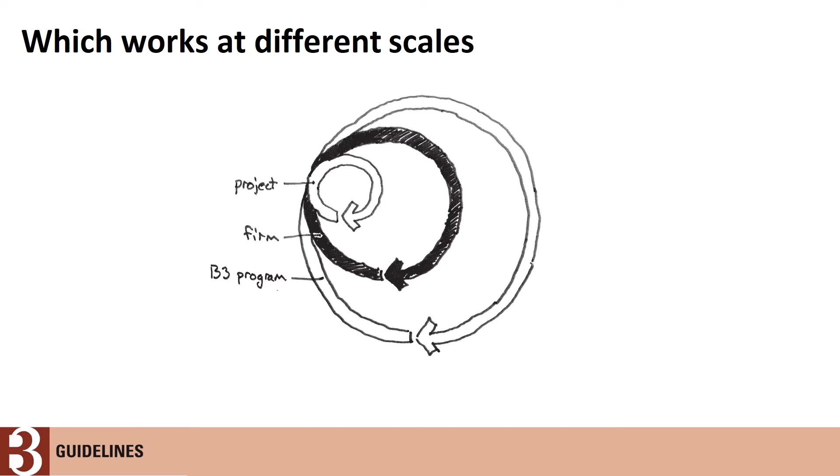Also, I think as we looked at this and after we did SB 2030, which is the energy program that sets definite kind of metrics, we thought we should create and evolve all the guidelines to more sustainable metrics.

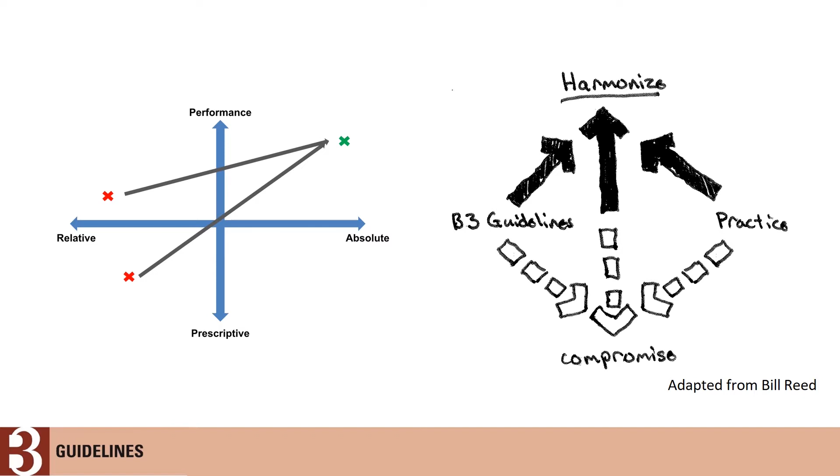And we've been offering educational courses. When we started SB 2030, we did a survey about how architectural firms would hit SB 2030. And we realized that really education is an important part of practice in order to build capacity to get there. And certainly this is one of the things.

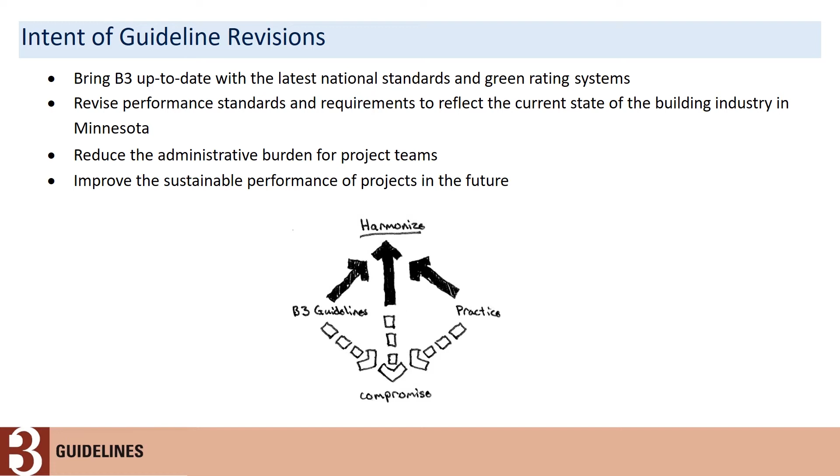We don't want to be on the bleeding edge, but these guidelines probably won't be revised in 10 years. So if we take a middle point or low point, in 10 years we'll be way behind. So I think we're above average on this. If we're good looking above average kind of people. And so we want to make sure we're pushing the envelope, but not on the bleeding edge.

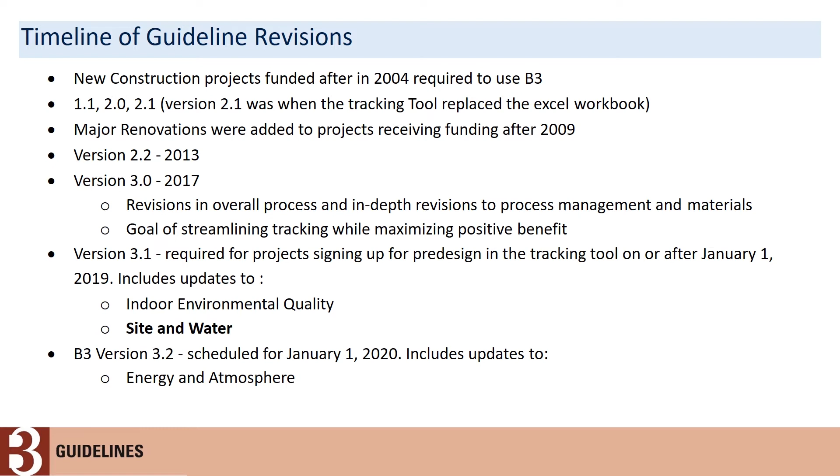So we will do energy and atmosphere next year, and have you got any feeling what kind of changes are going to happen on that? A lot of that is determining what renewables look like, similar to what we did here, if you can't do it on your building site, but you may have a campus opportunity to do that, and what all of the process is around that. Okay. So that will be coming out next year. Okay.

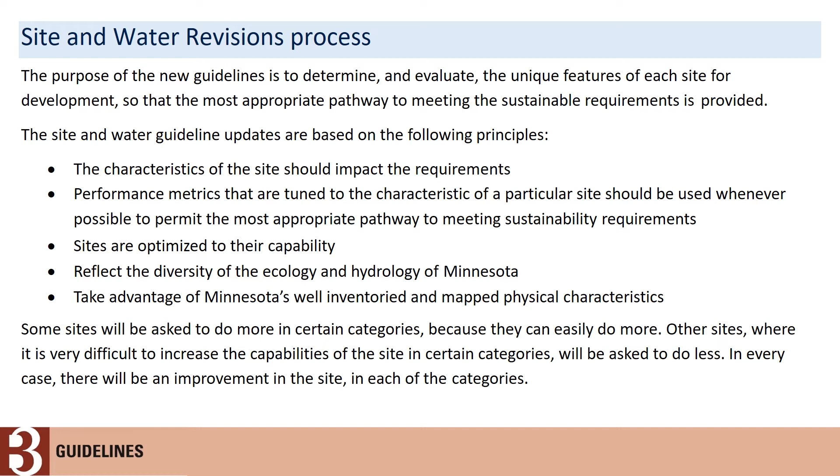And it reflects the diversity of the ecology and the hydrology of Minnesota. And it takes advantage of Minnesota's inventoried site conditions. It's surprising, we're one of the few states in the union that have very, very good site characteristics across the whole state. They've been inventoried, and we'll look at some of those. Some will be asked to do more in certain categories, some will be asked to do less. But in every case, there will be an ecological improvement in the site. That is the determining factor.

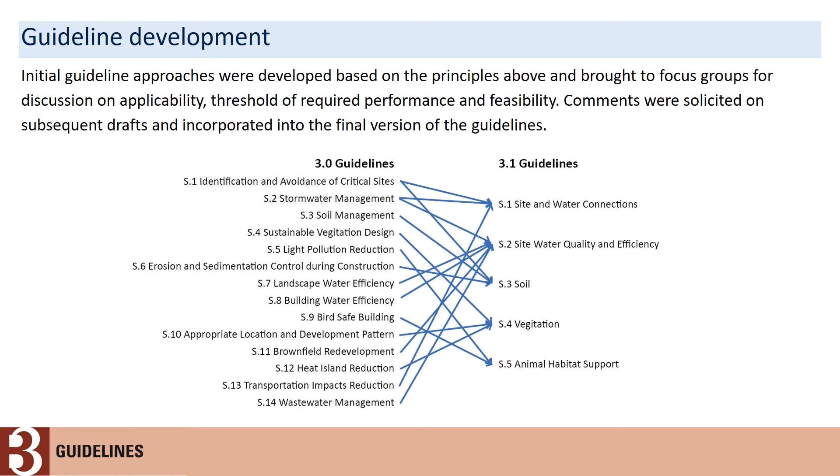So here's what I mentioned before. The bad news is there were 14 before. The good news is there's only 5 now. But we're not asking you to do more. We're just asking you to do it differently this time. I think the old guidelines were just old thinking, saying that every site should have so many trees, every site should have this much water capacity, and so forth. They were too binding for the sites, but we know about sites.

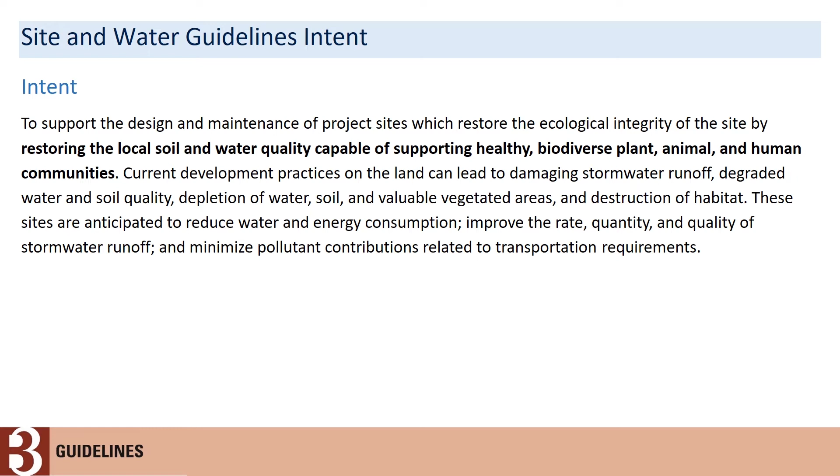The Millennium Assessment in 2000 put a stick in the sand, and now we look 15 years later, almost every ecological system on Earth is degraded, except one. Can anybody mention the one that isn't? They're sitting in this room. Humans haven't degraded, but almost every other ecological system has degraded. So we've got to change, right?

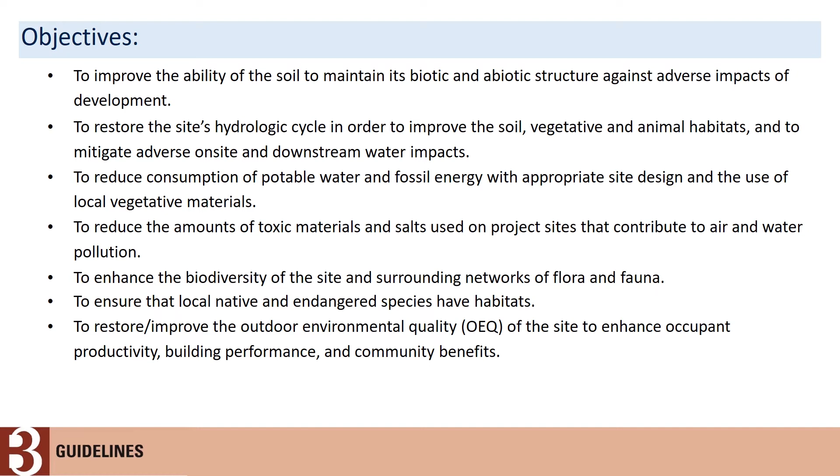I'll let you read these. These are the objectives that we are looking at. Looking at soils, both biotic and abiotic. Restoring the site's hydrological cycle. Reducing potable water and fossil fuel consumption. Reducing the amount of toxic materials. Enhancing biodiversity. And improving outdoor air quality, environmental quality.

So one thing that came up is site. Usually site will be defined by the property lines in most cases, if you have property lines, or it can be defined by how much you're disturbing. So if you're on a large property, a campus or a corporate campus or a park, you can define your own site area by how much you're disturbing, and you can use that. You can stretch it out how you want in order to meet the guidelines. So under site, I think it's pretty flexible.

And let's say you're on a pretty concentrated campus and you need to have some habitat. You don't want to put this bee habitat right next to the entrance of the building. You would like to move it over to a place where it might be more hospitable. And maybe you've done projects before, so if you're building a bee habitat, you might want to put all your bee habitats together. Because the larger the ecological footprint, the better. A lot of small ones aren't as good as one big one.

So we would actually encourage people to put their animal habitat and things like that together on campuses, rather than every project having these small habitats around them. Is that understandable? So there's some flexibility in site, and certainly if you have questions, Pat and Peter and I can talk about that to get the best ecological performance we can out of the site.

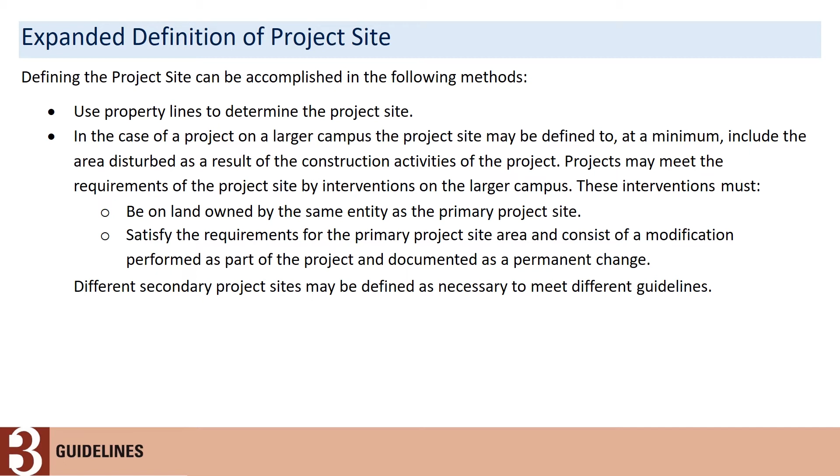Now, when you're dealing with an urban site, it's going to be difficult, and we'll talk about that a little bit. So as long as the land's owned by the same entity, we can do that. And even if the land's owned on either side of a right-of-way, we'll consider that the same entity. So even though a right-of-way might come through there, we'll work with that. And then satisfy the different secondary project sites defined as necessary to meet the different guidelines.

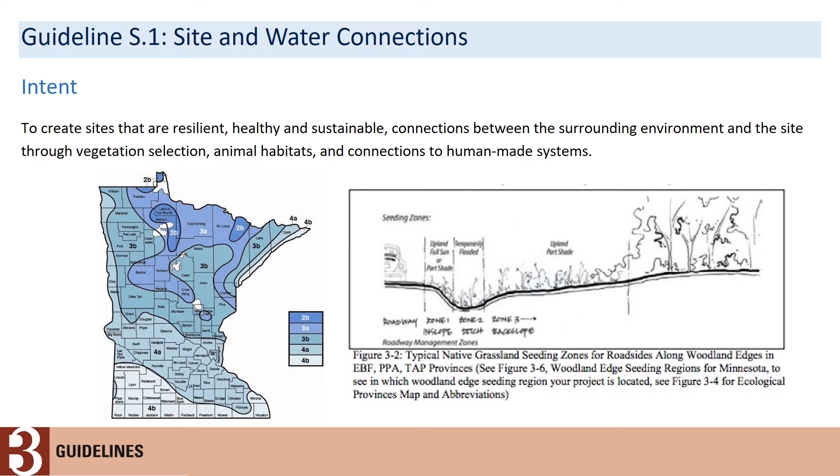So here are site and water guidelines. The first one, we show the hardiness zones. Not every zone in Minnesota has the same ability to have certain plant materials. Peter and I teach a site and water course, in which we talk about rainfall and stuff like that. And it's surprising that students don't know it doesn't rain the same amount across Minnesota, much less the United States. They think every place has the same amount of rain. So until you come about thinking about that, then it really makes a difference. And of course, you know about it.

What's really neat about Minnesota was this Marschner map. And the land survey from 1847 to 1907, essentially people walked Minnesota, I believe by square mile, and they not only drew maps of the area, but they also made observations about water, ponds, rivers, trees. Basically they were looking for resources, but what this gives us is a really good map of exactly what was here, the natural vegetation before we decided to farm practically the entire state. And you can get it almost down to a site level.

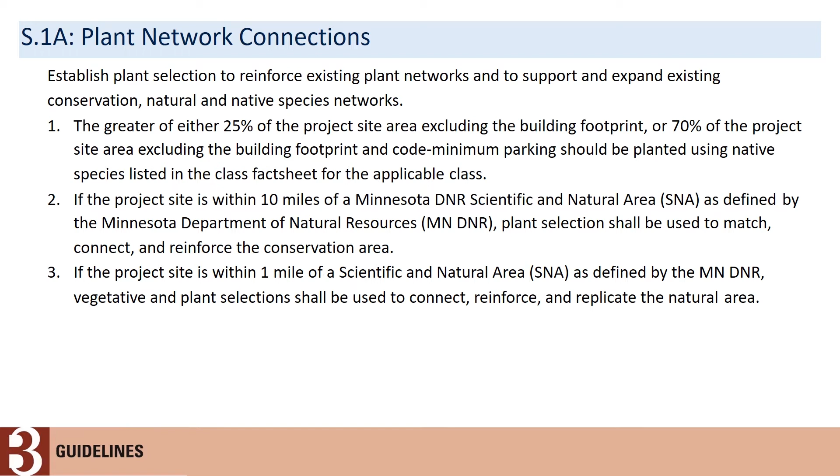Then animal connections. So if you're within 10 miles of a flyway, you're going to have to create nesting habitats and feeding stopovers, some kind of feeding, water, and habitat on your site. There's not too many major flyways here: Mississippi, Red River, and maybe some other ones, but they're pretty well defined. So if you're within 10 miles on either side of those flyways, you're going to have to start creating some habitat. If you're within 1 mile of an existing or planned animal movement corridor, then you're going to have to talk about how you are going to support that, and we'll talk about that a little bit. If you're within 10 miles of a wildlife management area, we expect some kind of connection there.

If the site is within 1 mile of terrestrial habitat of rare, threatened, or endangered species, if the project's within 1 mile of a habitat of a rare endangered insect or arthropod, and then if it's adjacent to aquatic habitat of rare threatened fish, if the project's within 1 mile of a known bird habitat or nesting of rare, threatened, endangered species, and then if the project's within 10 miles of a national refuge.

All those things will require you to make some kind of connection in some way, whether it's through the plant connections, a habitat connection, or a food connection that habitat would be compatible with. So each one of these will be specific, and I'll get to that. Then there's human connections.

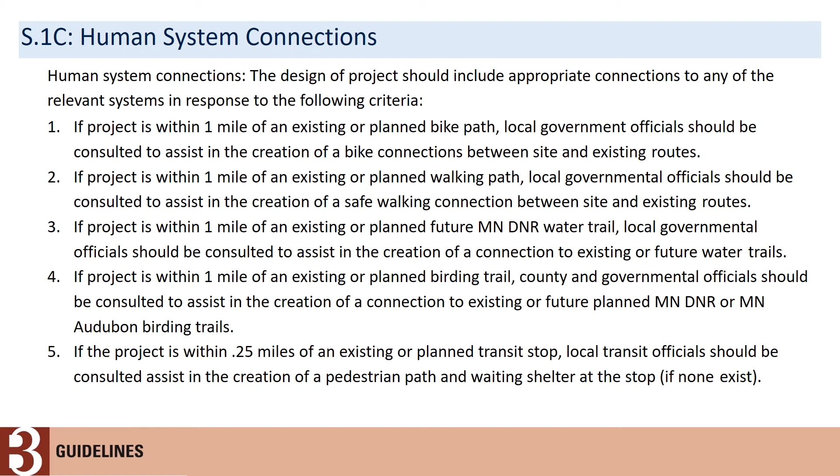It's a little nebulous, but at least your project should not be an impediment to any one of these expansions into these trails. So if they're close to you, you should be aware of it. It might even come close to your site or right through your site. Okay, and then a quarter mile for existing transit stop. That was in the last one, but essentially all these other ones are not. So again, it requires some circumspection of the site.

And here's the requirements. So how we determine is listing vegetation selected, demonstrating compliance, including a class fact sheet, narrative on the project's connection to native and conservation areas, and list of species selected from the class fact sheet. So each one of these SNAs has a list of plant species that are in that SNA, and we would expect you to show that and also your plant selection.

And then a lot of it is just documenting on the site plan, animal habitat is required, and also human networks, where they are. You might have to show a little regional map. If there's none in the area, then you're scot-free, aren't you? But if there is, then you're going to have to start making those connections. So it's a lot of requirements, but if you aren't within 10 miles of an SNA, you're done.

And how many SNAs? Do you know how many SNAs there are? Scientific and natural areas. There's about 400 of them in the state of Minnesota. Yeah, there isn't too many in the urban areas, although.

Okay, so I want to talk about water quality and efficiency. Site water and then building water. So again, to restore the natural water cycle. The theme of Peter's and my class that we've been teaching almost 16, 17 years now is restoring the natural water cycle. First you have to know what the water cycle is, and then you've got to work on restoring it. And it's kind of interesting how much we've degraded it throughout the whole of Minnesota.

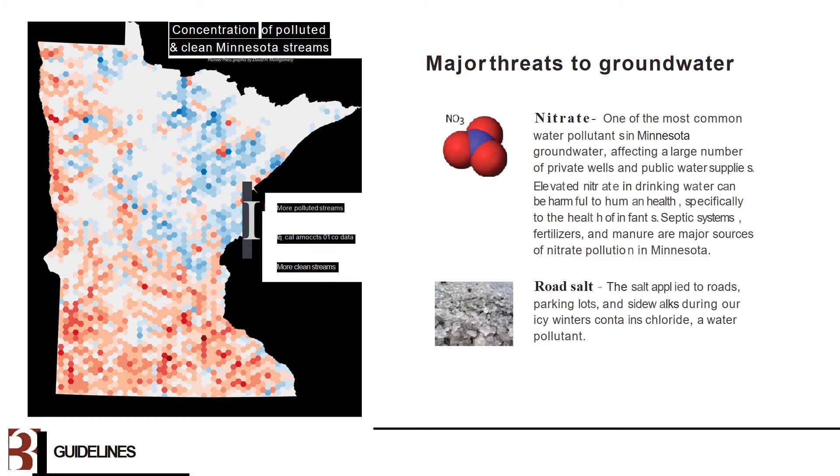So some of the major threats to water quality are nitrates, nitrogen in the runoff, and also road salt. And we'll talk about road salt. Road salt is a new thing coming into this, and we need to address it. But if you're on the top of the watershed, for projects located in uplands, Group A and Group B soils have to infiltrate almost all their water. So why do we want the uplands wet?

Because essentially that's where the groundwater comes in, is the uplands, and it will go down. We don't want to wet the lowlands, right? That's called flooding. So we don't allow a lot of the water to come off the uplands. So if in fact you are in the Midlands or lowlands, you're type A or type B, you follow the other ones. But if you just happen to be located on the top of the watershed, we want to make sure you infiltrate. And then for projects in the lowlands, A and B soils, we want you to infiltrate a little bit less. But again, infiltration. And then if you're located in between, then you follow the other one.

And then features and site locations: watersheds or lake sheds, or any site watershed features should be shown to inform the design of the site. So we have watersheds as well as lake sheds here, right? And if those lake sheds are impacting your site, we want to know whether they're impacting your site. You should know what watershed you're in and where the water is going. And that is broken down pretty precisely on maps the DNR has.

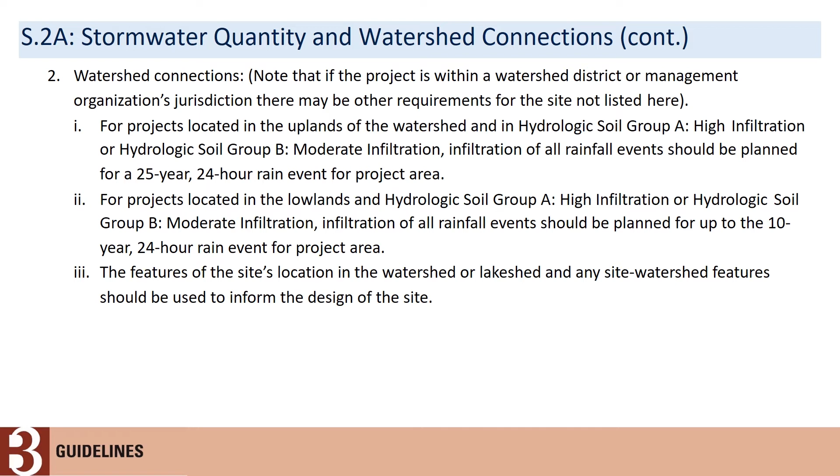Okay. And then the flood prevention, it's essentially you can't build in the floodplain unless it's essential to the program of projects, and then you have to build, I believe it's 2 feet over the 100-year flood. Usually we wouldn't allow you to do it, but sometimes you have to build in a floodplain.

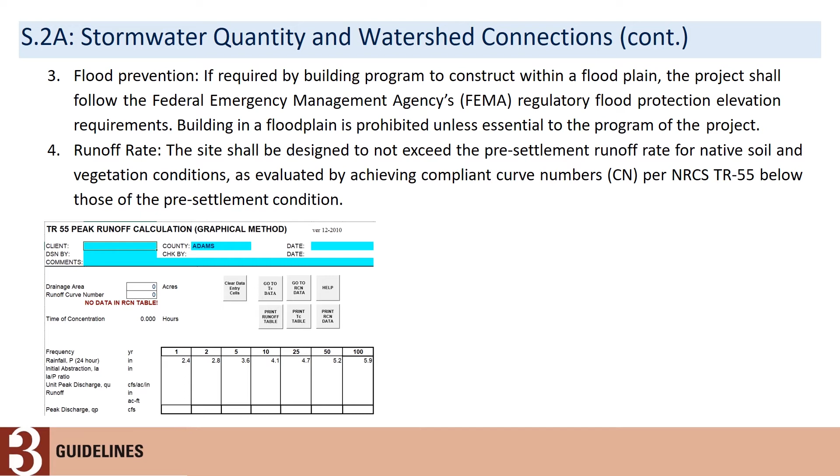And then the runoff rate. Sites should be designed not to exceed the pre-settlement runoff rate for native soils and vegetation. And you can comply with that using TR55. People aware of TR55? It's a pretty simple calculation. There's a map of it. So essentially, when you have runoff, and you can have runoff in B, C, and D soils, it should run off at the same rate as pre-settlement. So there's going to be some holding on some D soils, right? You're going to have to hold it somehow.

Okay. Outdoor water efficiency. Again, this is a change. No potable water should be used for irrigation after 5 years of plant establishment. So after 5 years, no more irrigation from potable water. You can certainly use roof water. We would expect that a lot of the plant species you plant are pretty drought tolerant. But if you want to have areas that you need to water all the time, some special planting areas, you can use roof water to do that. There's an exception: if actual rainfall per month is less than 30% of the average, then potable water can be used again in order to sustain the plants.

And then areas such as athletic fields are exempt. Anything that has a program on it, and it has to be a program that's pretty viable. You can't say, well, we like to walk on this area and look at birds. No, it has to be an athletic one. Then that can use irrigation all the time. Okay, how's everyone feeling about this? The first time we got a lot of pushback on this one. But I think it's doable. I just really think it's doable. And there's no sense in keeping on watering plants when you can use either roof collected rainwater or gray water.

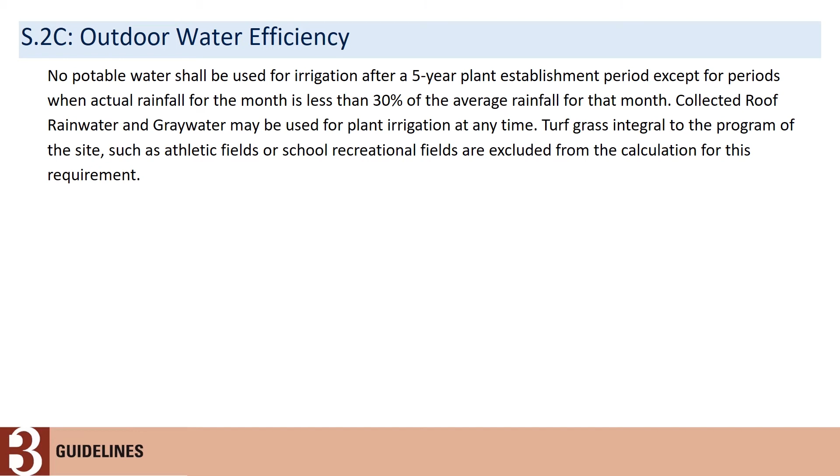Yeah. With some treatment. Okay. Indoor water efficiency, it used to be 30%, it's going up to 50% less than a baseline established on the 1992 Energy Policy Act. So we put that up there. And the criteria can be met using low-flow fixtures, recycled rainwater, and other strategies. So it's just potable water, 50% reduction in potable water.

Renovation portions may be limited to criteria, and it will be based on the number of fixtures, and there we'll ask for certain things. Recycled rainwater can be used to offset the percentage of potable water if it's allowed in the jurisdiction. And to verify compliance, it will be the same operation of the building, the sub-metering. So we have that kind of B3 water guide right now, so we're just going to 50%. So a little bit more ratcheting that down. Any questions on that mechanical?

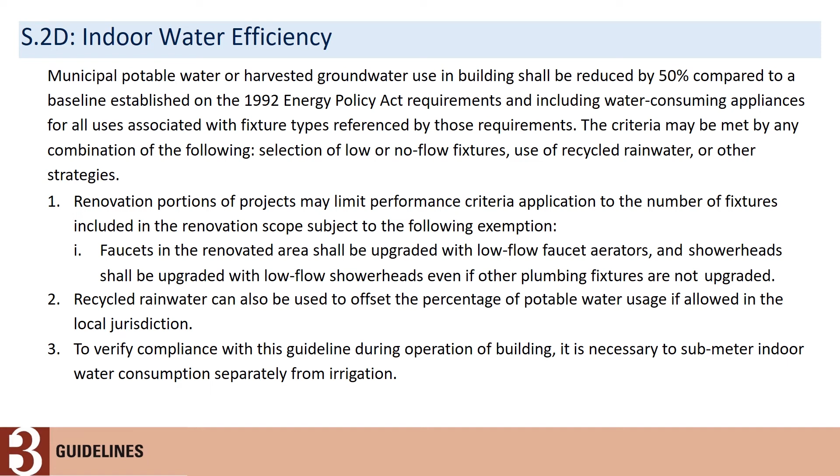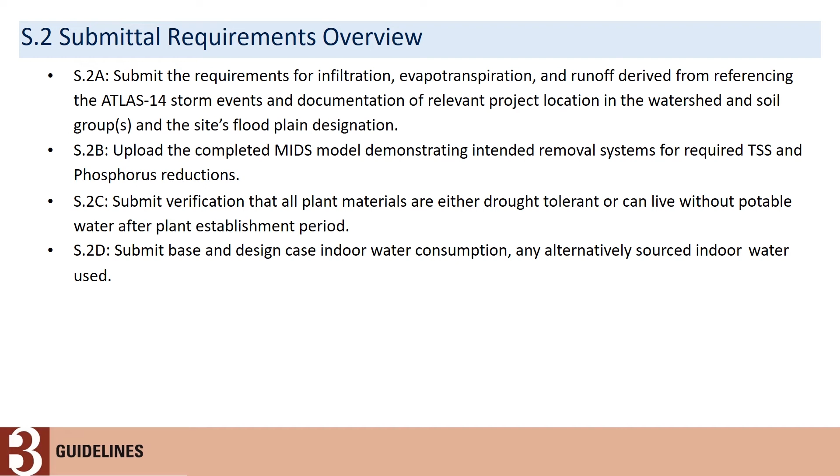And then submittals. Submittal requirements for infiltration, evapotranspiration, etc. Upload the complete MIDS model, demonstrating intent to meet removal systems required for TSS and phosphorus reductions. You could almost use that for 2A too. I think MIDS looks at runoff and all these various things. You can design it within MIDS to look at what best management practice you can use. And then submit all plant materials that are either drought tolerant or can live without potable water. And then submit a base case indoor water consumption. All right? I think that's it. Any more questions on that?

So you can see how we're looking at more network-wide kind of issues than we have before, and looking at information on the site and in the area to support the requirements. So Peter will go on and we'll go even further into this. I'm Peter MacDonagh with Kestrel Design Group. So I'm going to take you through three others, which are soils, vegetation, and habitat fauna.

And we expect that there's the soil triangle. There's 12 types of textures on there. If you go to the Web Soil Survey, WSS, you can excerpt any site in Minnesota, and you put an area of interest around it, and then it comes up on the left side. You'll hit the soil series. It'll tell you the soil series. So the soil series are basically like species of soils, and it'll tell you what textures your soils are.

It'll give you all of this detail, except if it's in a very urban area and it's a Udorthents or it's Udipsamments. So it's a sandy kind of urban soil, or it's an all mixed in kind of an urban soil. In which case, there's other things that you get directed somewhere else. We're looking for you to then amend those soils if you're planting stuff into it. But if you've got this kind of a system that you fall into, then we want you to work with the WSS, the Web Soil Survey.

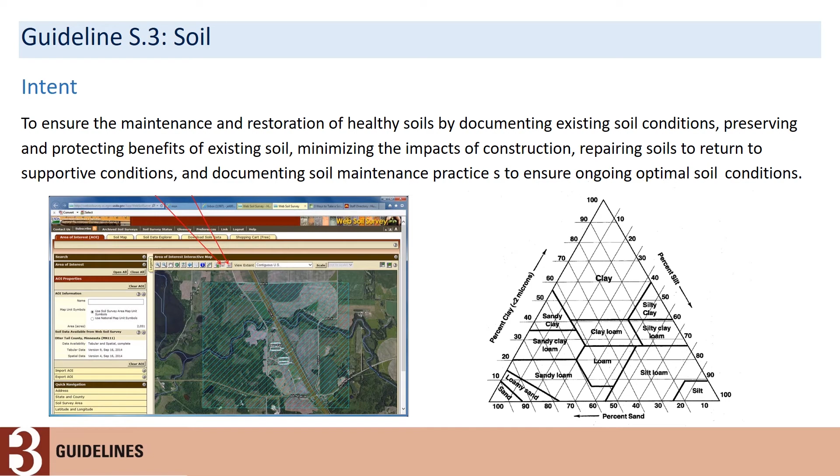So a site soil inventory map, and this is for the areas that you're not putting buildings on or you're not putting parking lots on. It's for that area. 8 soil orders. So Minnesota has 8 soil orders, 1,000 soil series. But like I said, if you go to that site, you will get all of that information. So you don't have to send a soil scientist out on site to get it for you.

Listing of soil limiting constraints for organic or wetland or expansive soils. So if you're up in the Red River Valley, vertisols, shrink swell. That'll take you into a different category. Obviously, wetland soils, we want to know what's going on there in terms of, is that a jurisdictional wetland or not? And organic soils, if there's a very, very high organic matter in there, as an example, 10%. Or histosols have 30%, so they're really gooey. That puts you into another category.

3 stages. So we've come up with these 3 categories of soil, whether it's a natural soil, an agricultural soil, or an urban soil. So if you see that Udorthents or Udipsamments come up, that's an urban soil. If it's agricultural, it means that if you dug a trench, you'd see an A horizon and a B horizon and a C horizon, but you'd see compaction and other kinds of things in there. And if it's a natural soil, so it was woodland and then it was cleared off and it was grazed, but it was never plowed, then that will have an O horizon as well and maybe an E horizon too. So that's defined in there.

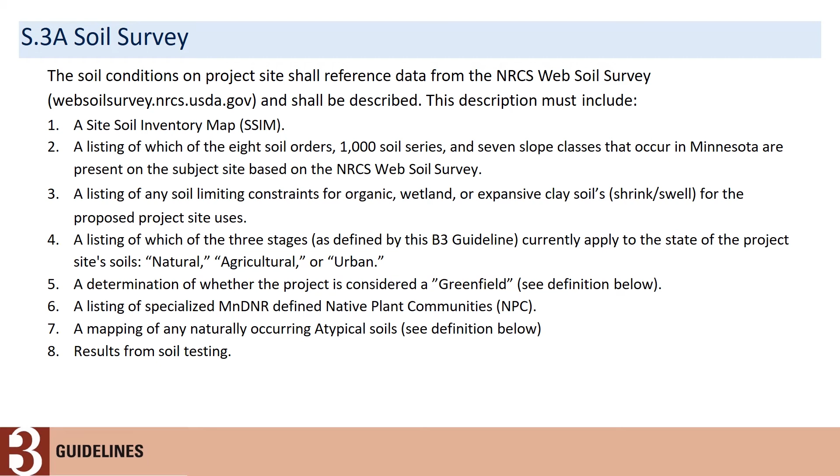And atypical soils. So that's an unusual situation. So I said a histosol as an example, or a vertisol, then we want you to treat those differently, but you're rarely going to encounter that. So that's just kind of almost an outlier. And then we want you to do some soil testing, but it's the soil testing you get at the University of Minnesota Soil Lab. $17 a test, that kind of thing. So we're not asking for something really extensive, but we want you to know what it is you're dealing with. And I said about the greenfield site rationale, if you have to be on a greenfield, these are the things that we are requiring for you to do.

Limit soil disturbance. So these are from landscape architecture practices. So these are not new, but we want to put it in this so that it becomes part of this guideline. So 40 feet beyond the building perimeter. So again, all of you have seen some of these trucks have some kind of magnetic attraction to green fields, so they just keep driving out onto green areas. We want to eliminate that. So we want to put the boundaries on that and enforce it. So we've got distance from buildings, from roads, from walkways, and from trees. Stormwater management areas, obviously an infiltration area.

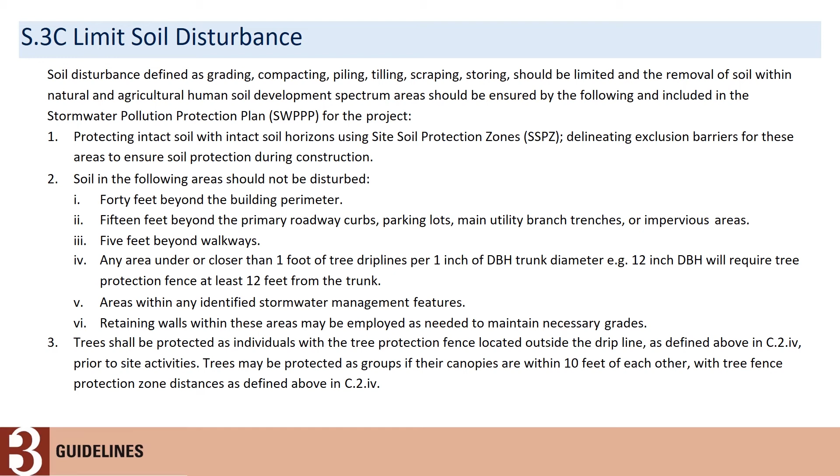And I'm sure you don't want trucks going across there. Then we have bulk density limits. Again, this only refers to the places where there's going to be things planted. So if it's a clay and a silt, bulk density limits of 1.25 grams per cubic centimeter. And this doesn't need to be done until you're right at the end of your project.

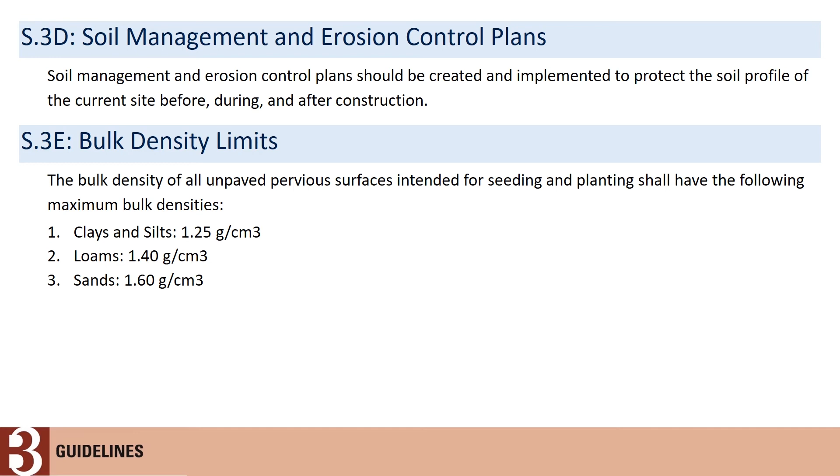So just, if you have enough organic matter in here, you're going to be just fine with these. And the organic matter threshold we set for all these soils is 3.5%. So if you're at that, you're probably not going to have any issue meeting these bulk density limits.

A delineated wetland boundary, so a watershed buffer, pretty simple. This is one that's been in there before, but we want to again bring your attention to it: when you're done, the areas that are going to have plantings on them, except a green roof, or there's some other structural reason for it, need to have a 12-inch deep topsoil respread. Not a 4-inch, not a 6-inch, not an 8-inch, a 12-inch. And we want that confirmed before soil is sold off a site. Okay.

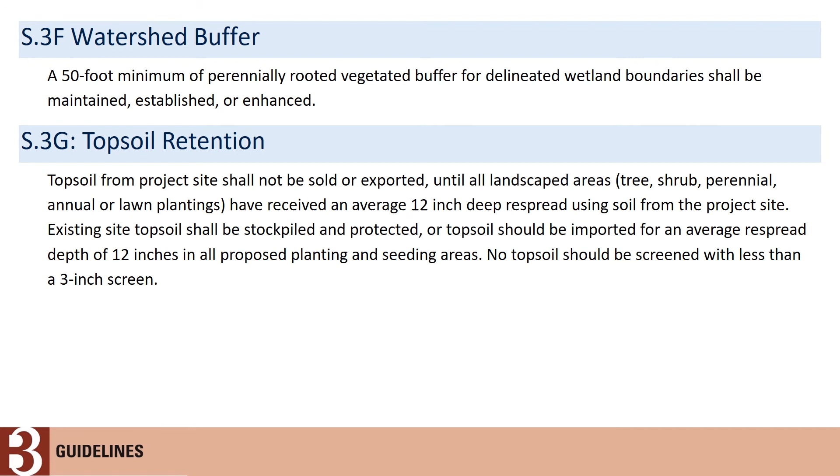Pretty wide range on pH, 4.5 to 8.5. And pH, I covered that one already. For urban soil requirements, same on the organic matter. And if it's Class A biosolids, that's just fine with us. Something cheap like that, wood chips, cheap compost. What we're looking for is the organic matter incorporated in there. We're not looking for a specific kind of compost. If it is a compost, we just require that it meets the U.S. Composting Council Guidelines, which is basically there's no weed seeds in it.

Pre-development, if there's a compaction layer, we want you to rip it and incorporate organic matter into it. If they ran across it a bunch of times, then we want you to take it down to 12 inches. If it was farmed, we want it down to 24 inches. And minor modifications, so you can call out areas where it's just a top dressing on the top.

Soils modified to achieve the following NRCS infiltration rate, and Rich took you through that. Natural is group A, agricultural is group B, C, urban soils, and group D, obviously, you're not going to be infiltrating in that. Cation exchange capacity of at least 15. Again, that comes on that cheap soil test. It'll tell you what that is, and essentially it's the ability of the soil to move nutrients around in it. And a 0 is a kaolinite. Straight up organic matter soil is 400, so 15 isn't that much, but we don't want it below that. Base saturation, at least 30% should be achieved.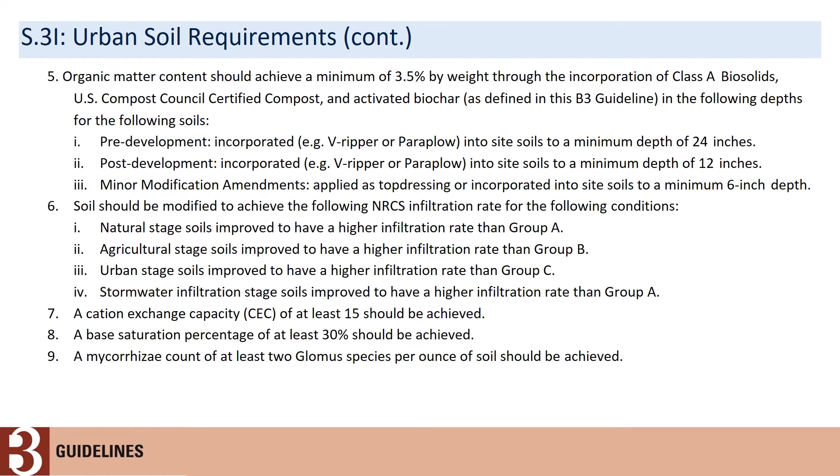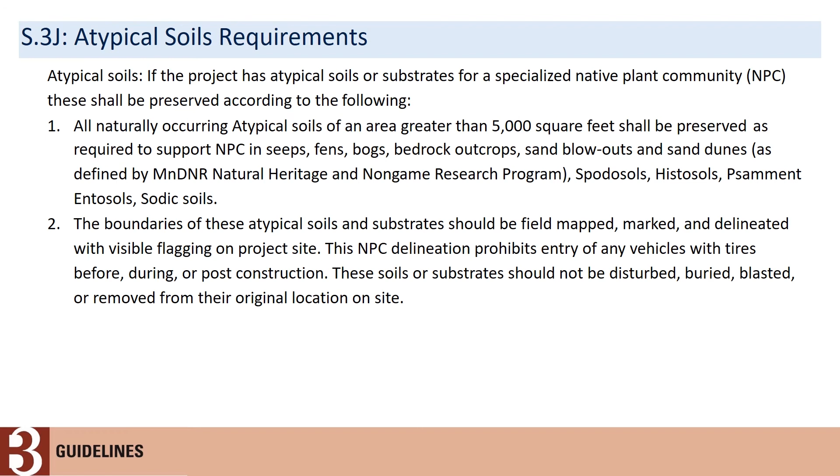Atypical, because it's a rare thing that you're going to encounter, it's only if you find an area where it's going to be planted and it's over 5,000 square feet in area, that these guides would apply, that don't apply the 12-inch topsoil respread, etc. Again, so the Minnesota Biological Survey, if it calls out that there's an S1 or an S2, then you're going to have to look and find that, investigate it on site, and fence it off.

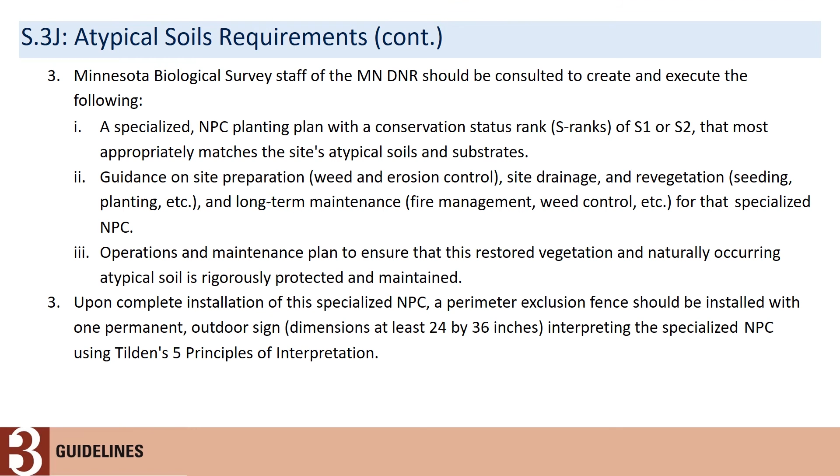Here's the submittal requirements. Description of site soils per the guidelines, so we want you to include in your package: I went to the web soil survey, I got this. I looked at the natural areas that were nearby. That package includes these things. So submit a site plan delineating the limits of the soil disturbance for the development of the project. Contract documents section with specifications for bulk density requirements for unpaved pervious areas. So these are areas, again, that are going to be planted in some way or another.

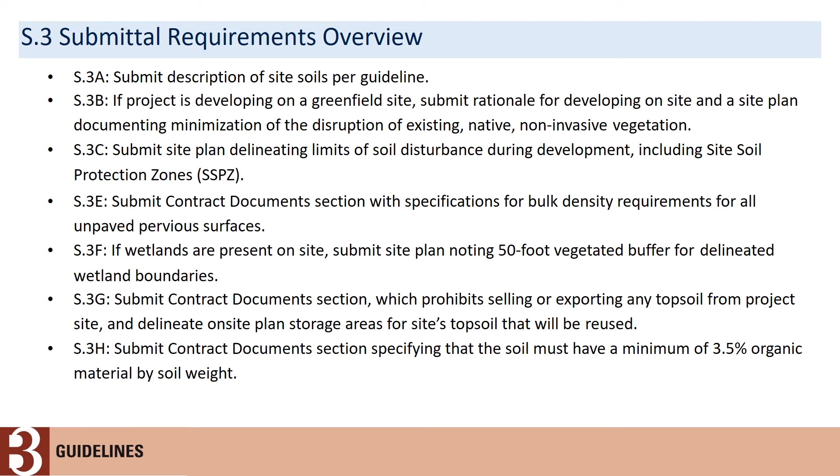If wetlands are present, submit the site plan noting the 50-foot vegetated buffer. Submit contract documents which prohibit the selling or exporting of topsoil if it's less than 12 inches. If you have 18 inches of topsoil and the contractor wants to sell 6 inches, that's okay. But the 12 inches is the standard we're looking for. And 3.5% organic matter.

So we want you to think about the urban soil restoration in units of about 1,000 square feet areas. This is what I'm doing here, here, and here, and they're all the same. So then I'm covered on this.

Submit results of coordination with the Minnesota Biological Survey for native plant community restoration, and that's within that 1 mile area. So that's not everything. And when we talk about the native, like a scientific and natural area, we're not looking for you to get all of the species. If there's orchids on that site, we don't expect you to have orchids on your site.

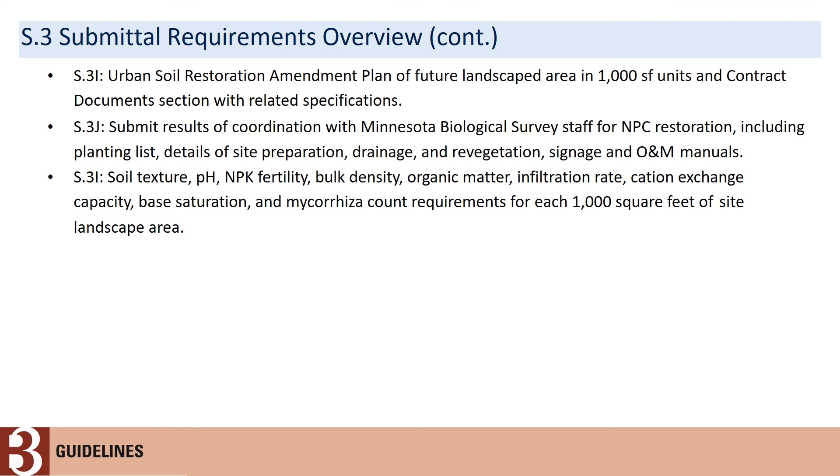So if a 0 is a buckthorn and a 10 is a lady slipper, we're looking for stuff that you're going to be doing in the 1s, 2s, and 3s in terms of coefficients of conservatism. So not extremes that we're asking for. We're basically asking for the base species that would show up, like big blue stem, little blue stem, the bulrushes, etc.

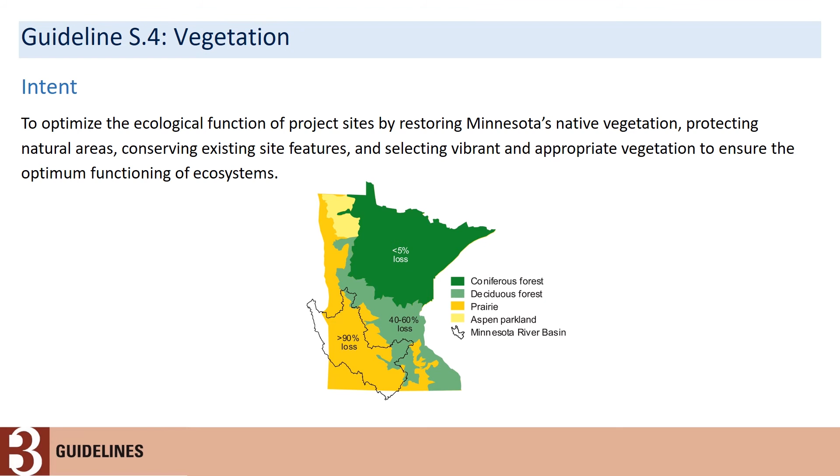Vegetation, this is just for information. We've had 5% loss in the boreal areas, 40 to 60 in the deciduous forests, and 90% in the prairies. And so if you're in the prairie area, we want you to try and incorporate prairie biome function on your site.

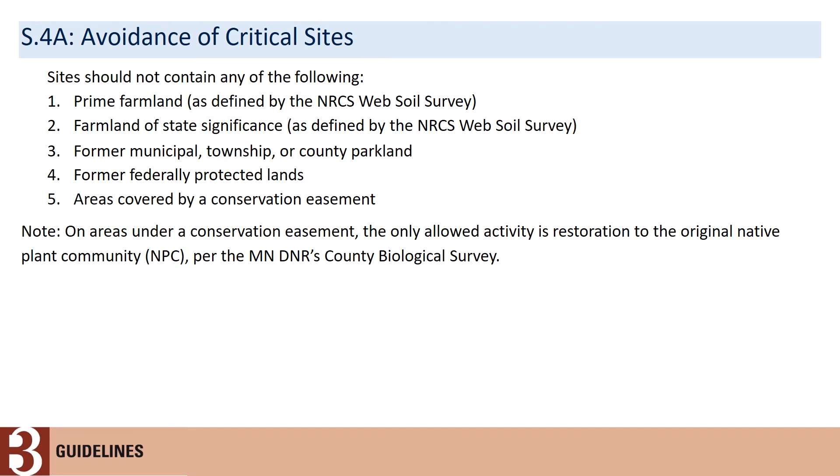Again, avoidance of critical sites, prime farmland of state significance, and you can get that right off of the web soil survey. It'll tell you. Former municipal, township or county parkland. We want to avoid taking parks out of commission to turn into development. Formerly federally protected land and areas covered by conservation easement.

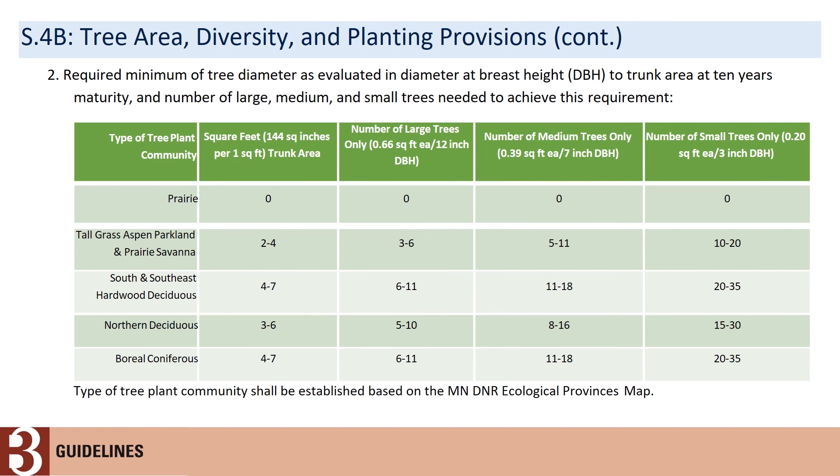So there's a chart which basically you can look up and say, okay, for me to get this, this is how many trees I'm going to need. And then we list off soil volumes; this really applies mostly to urban areas. Small trees, 400, medium trees, 800, and large trees, 1,200 cubic feet per tree.

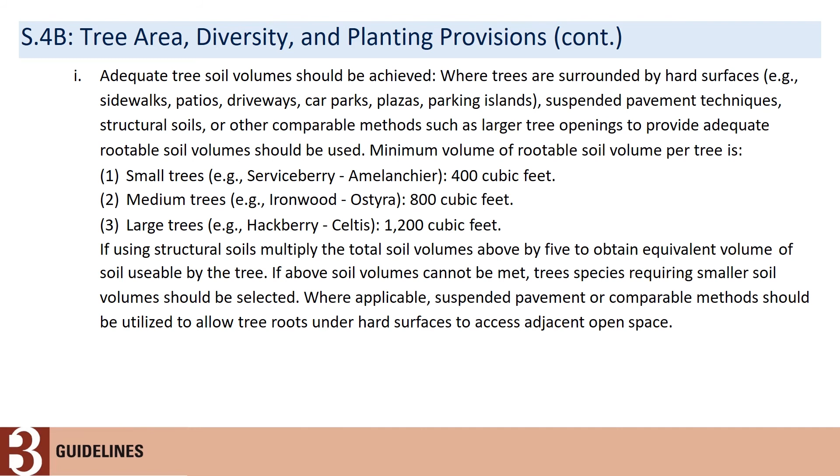If you're going to use structural soil, that's fine, but your numbers are going to increase dramatically because that is at a 5-to-1 rate. You're going to need 5 times those numbers up there if you're using structural soil. So it's easier to just use regular soil.

Diversity. So we're not looking at species diversity, we're looking at genera diversity. So if you have 5 different kinds of maples on a site fewer than 2 acres, that's really not what we're looking for. We're looking for you to have some maples, some oaks, some hackberry or hickories or whatever else you want. 5 genera on sites of 2 to 5 acres, and any genera, whether it's evergreens or broadleaf deciduous, as long as you have these kinds of numbers.

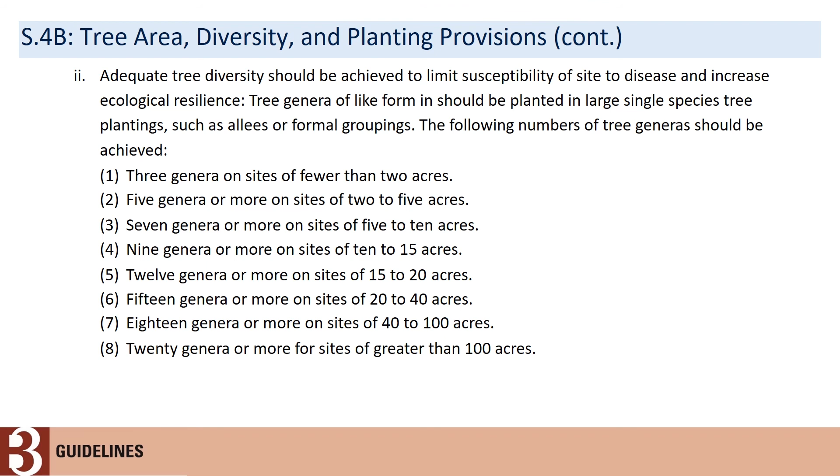And that only applies, no, sorry, I contradict myself, I won't do that. So, any case, here's the tree planting requirements, pretty standard. But it's based on the research, and I don't think there's a lot to say about that. Some irrigation requirements, and again, you have a 5-year window for establishment.

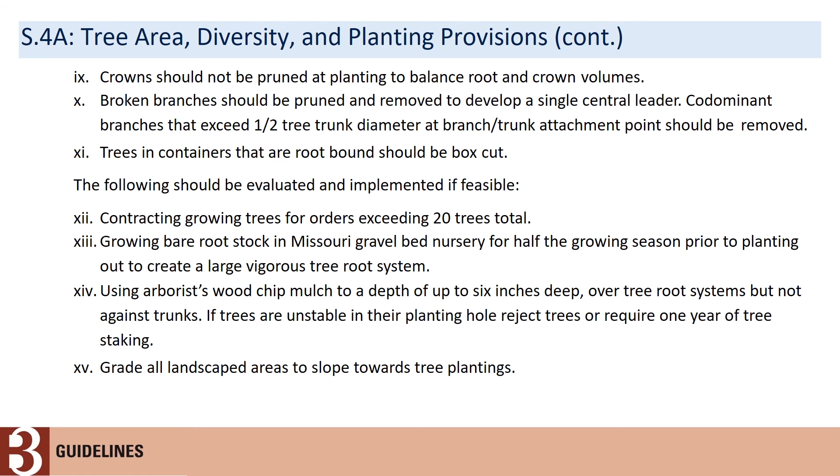And these are just more of those pretty detailed specifications we want you to incorporate into your specification package. And then if you're doing one of these plant communities, you can go to the Native Seed Mix Design for Roadsides website, and it will tell you what you can do. If I want a mesic prairie, it'll tell you what that is.

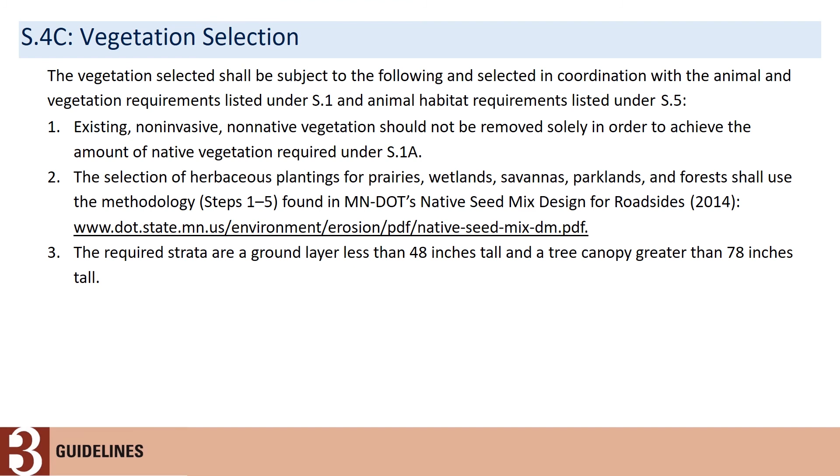And it won't say you need 3 pen sedge and 7 of this. It'll say if you use any of these 4 sedge types, or any of these 3 grass types, or any of these 9 forb types, you're okay, because we understand that you don't want to be chasing the last 3 ounces of seed in the state, and the cost that goes with that. So it's meant to have a market sense to it. And here's the various strata.

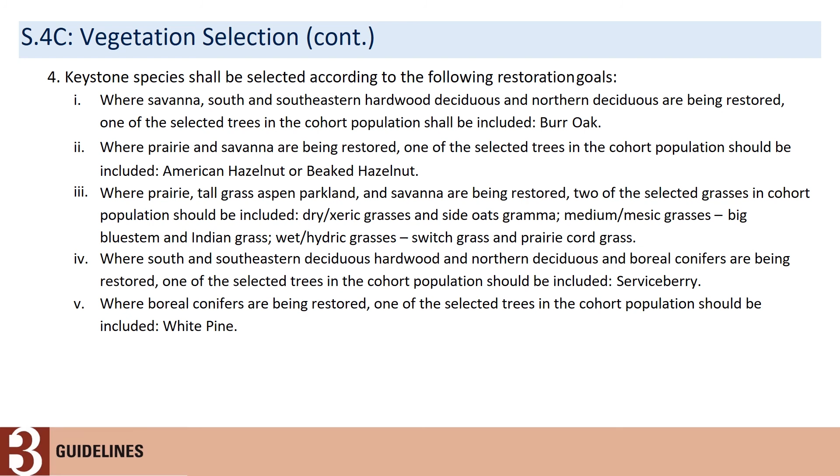Keystone species. So we're just asking when you're in these plant communities, southeastern savanna, south and southeastern hardwood deciduous, that there be at least some bur oak. If you're a prairie savanna, that there be some hazelnut on site. The prairie tallgrass aspen parkland, there be in a dry area sideoats grama, or big blue stem and Indian grass, hydric switchgrass, and prairie cordgrass. So just that some of those are showing up there as keystone species.

And then I talked a little bit earlier about the coefficient of conservancy, and that's what the floristic quality assessment is about. This really only happens in places where you're bumped up against a river or a stream, and we want you to look at what's there before that gets changed dramatically.

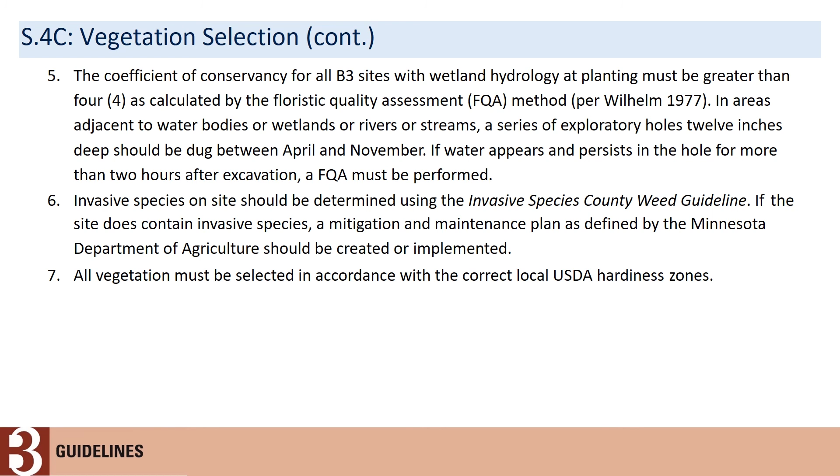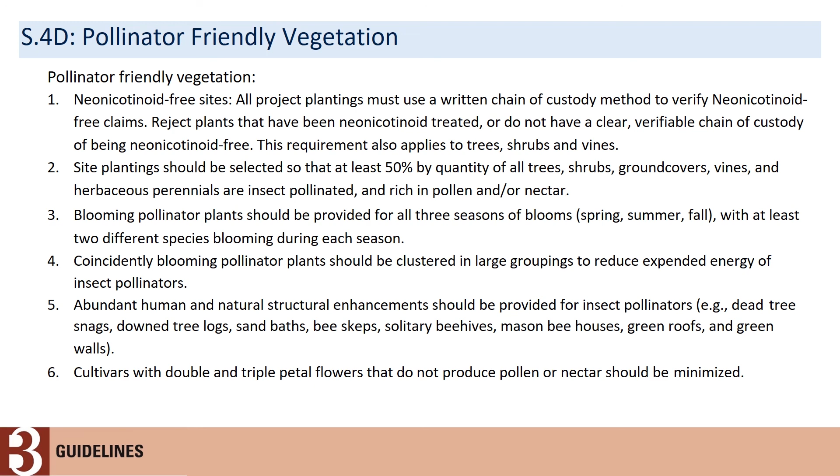And then we would like you to use natural structure enhancements for these pollinators. Pretty simple. They're cheap. Cultivars with double and triple petals, so a dahlia doesn't have any pollen benefits to it because basically all of the nectar and pollen stuff has been bred out of there. So we want you to look for stuff that's closer to the species than a very refined cultivar.

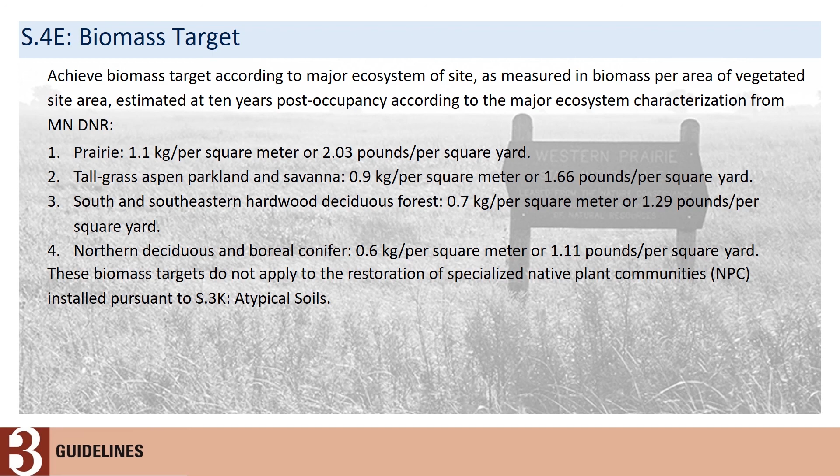Biomass targets, again, we have a chart for that so that you won't have to figure that out 10 years in. Site albedo. Yeah.

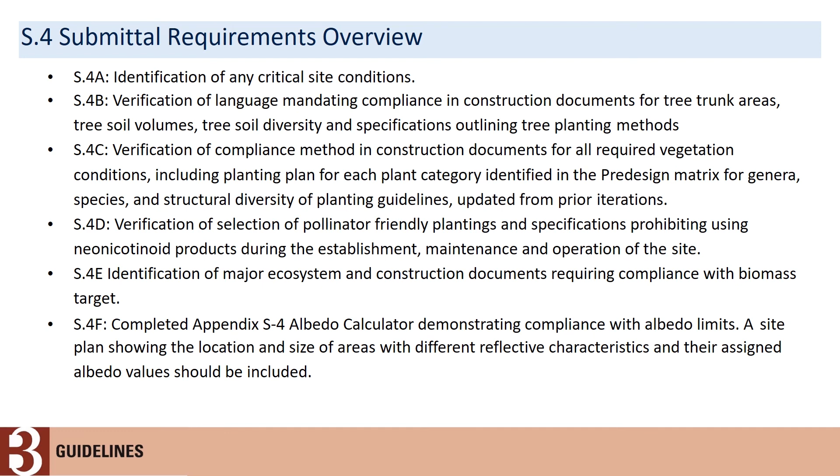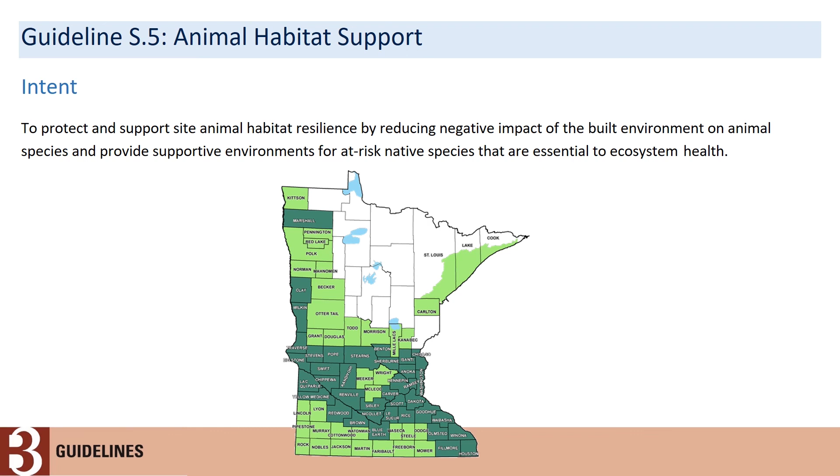So protection of rare, threatened, or endangered species. So again, if you're near one of these scientific and natural areas, or a plant community that has been called out on the biological survey as of importance, we want you to not put a connection between your site and this site, but support it in terms of the species that are here versus the species that are over there.

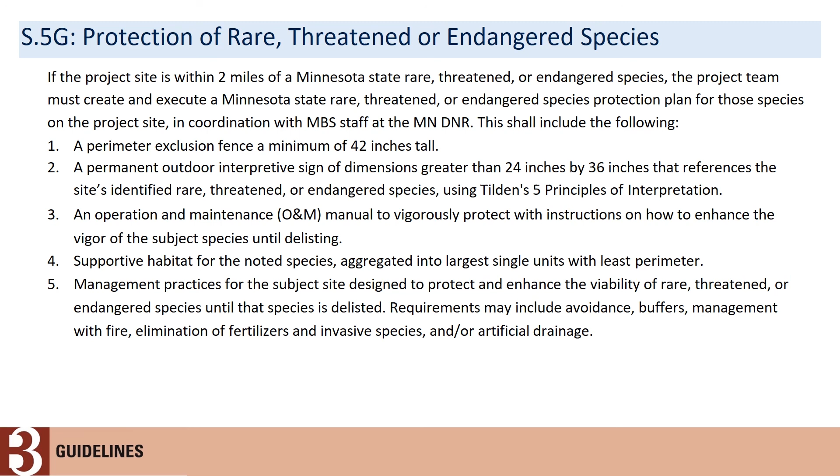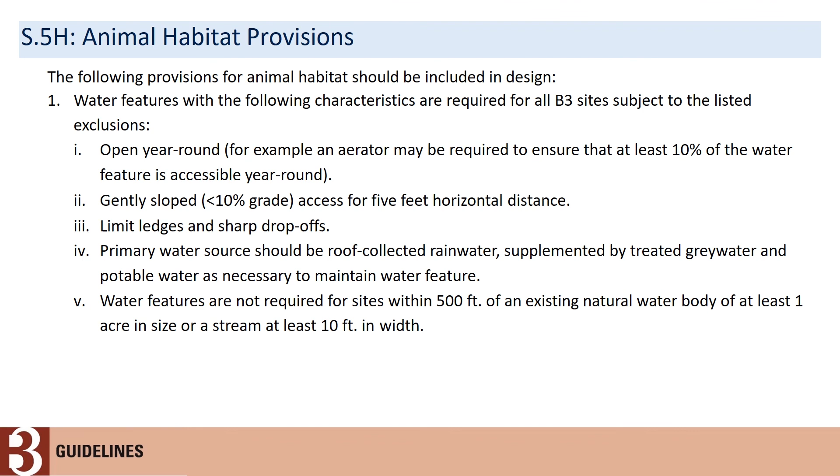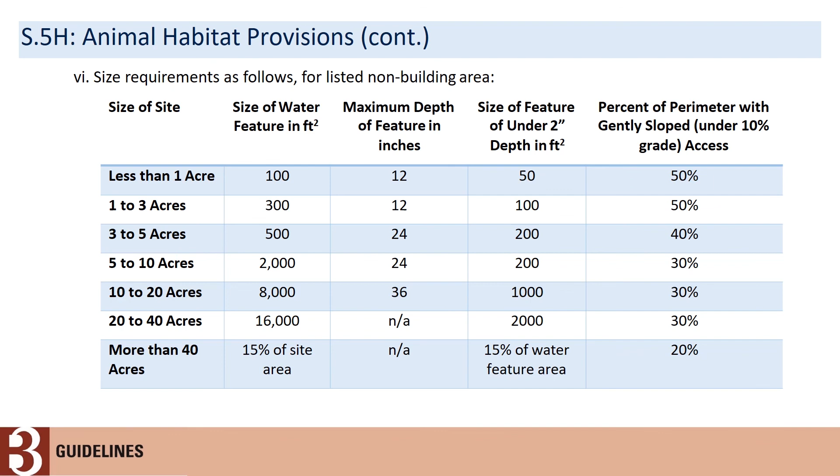And then the perimeter with gently sloped sides, features under 2 inches depth. So some shallow, a lot of shallow. Maximum depth of feature in inches. So again, we're talking very, very modest.

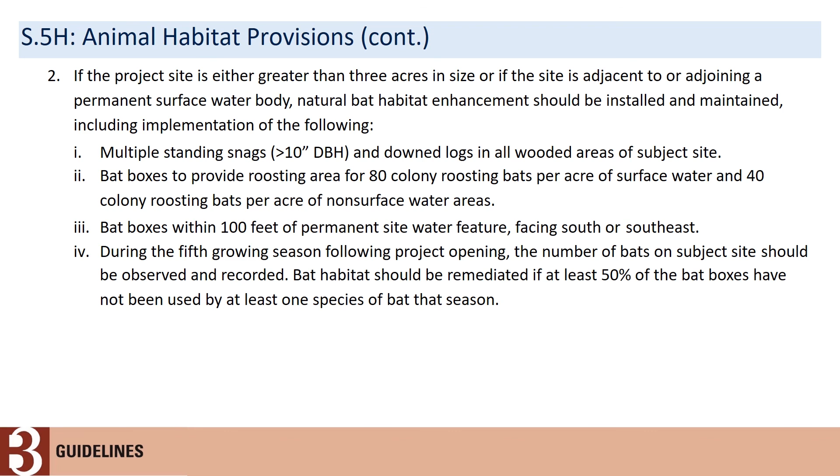Animal habitat, so this is the structural stuff. Bat boxes, we would like those included. When your site is above 3 acres in size, we want you to incorporate bat habitat. Right now, bat populations are going like this. They roost in bigger groups together, and more of those are eliminated. So we want to try and get more places in the landscape for them to hang out, roost, eat, etc. There's some more of the structures, pretty simple.

Okay, dark sky. Do you want to touch that, Rich? So dark sky, we're just going with the Dark Sky Association, and there's 3 different kinds of ordinances for urban areas, suburban areas, and rural areas. And again, it's going to be lumens per site. You'll have so many lumens to put on your site, and you can put them anywhere you want.

There'll be 10,000 lumens that you can put on your site. And then you figure out whether you want to put it in the parking lot or on special areas or whatever. So again, the metric is going to be lumens. And then you just have to show a map where the lumens are.

So that concludes our presentation, and now we're on to the questions part.